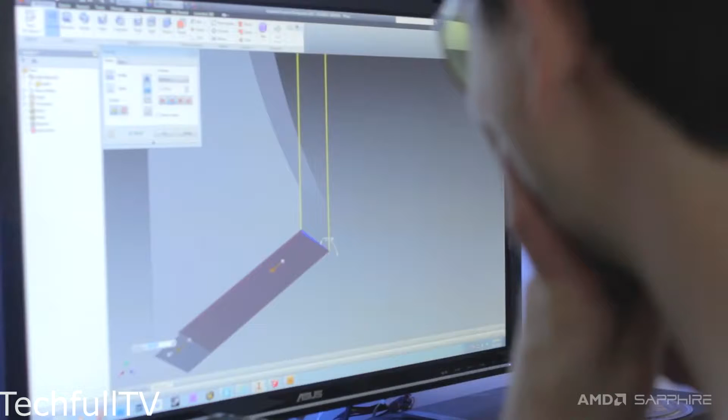I got my start building computers in high school. I was just kind of fixing grandma's viruses and building really low-end systems. I had a system I was pretty proud of myself, but I didn't really understand what computer modding was until I went to this LAN party in Oregon called PDXLAN.

We drove down there and I was blown away from the moment I opened those doors. I knew instantly what I wanted to do. Immediately, I started modding.

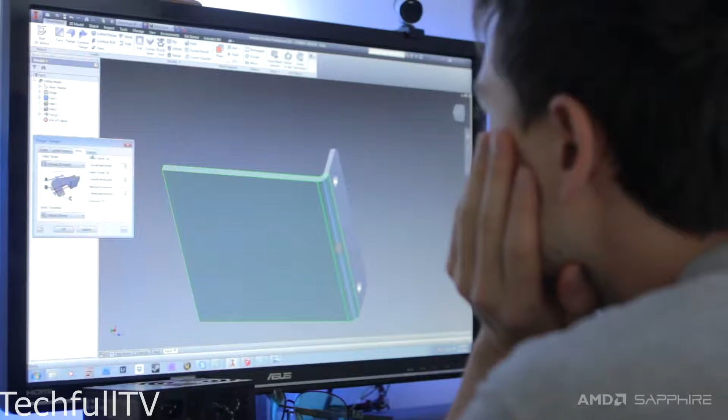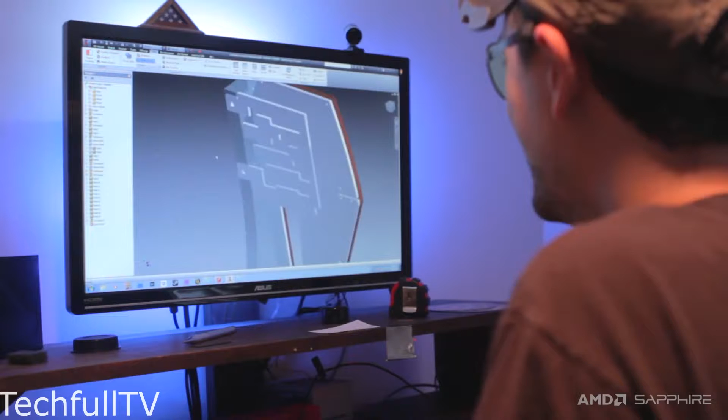For several years after that, I would be going to all the LAN parties in North America, building mods for all the competitions there, and I learned a lot. I went through a lot of material. But I was becoming drained because I had this passion. I wanted to do this full time, but it was becoming more and more clear that I was not going to be able to.

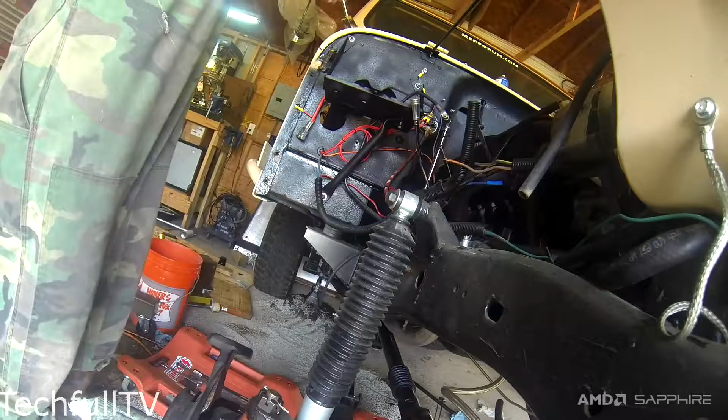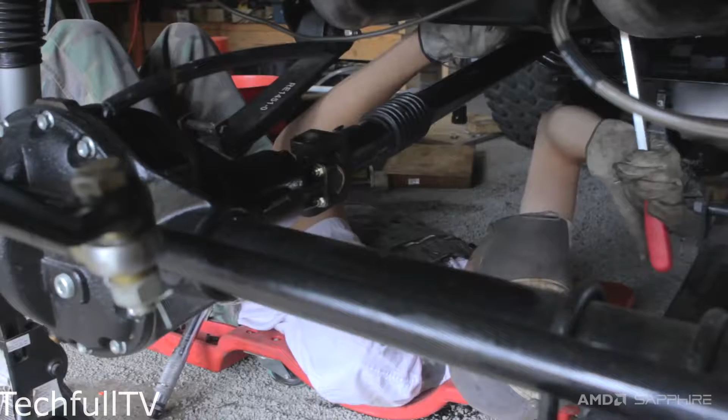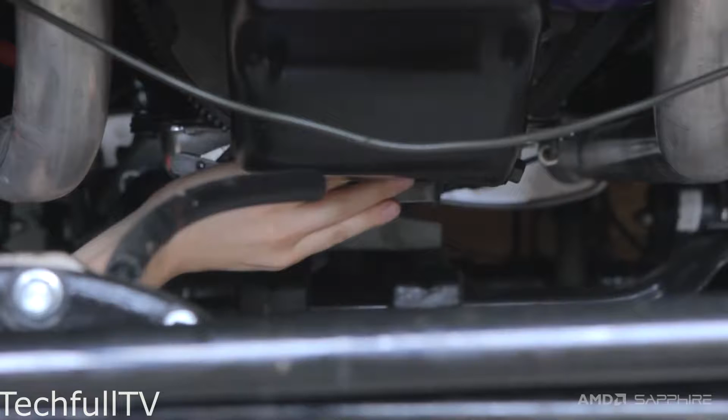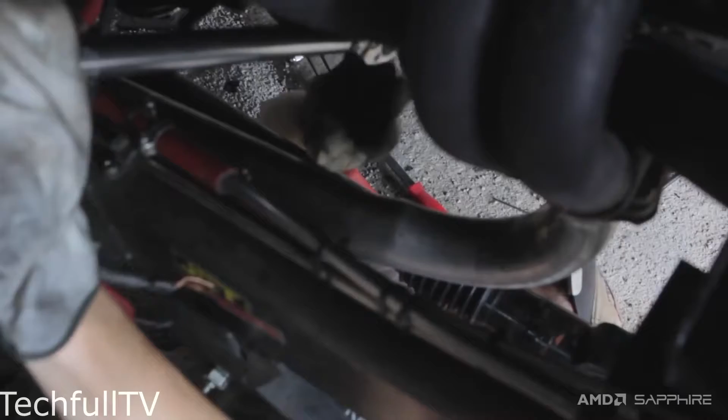And I flew halfway across the US. It was unfinished, and I placed really low down the totem pole. The reason that's important is when you're doing this full time, or you're thinking that you're doing this full time, you're trying to win to get the prizes to offset your cost. Either the parts are going to go into your next computer, or there's going to be some cash that might help fund your next computer.

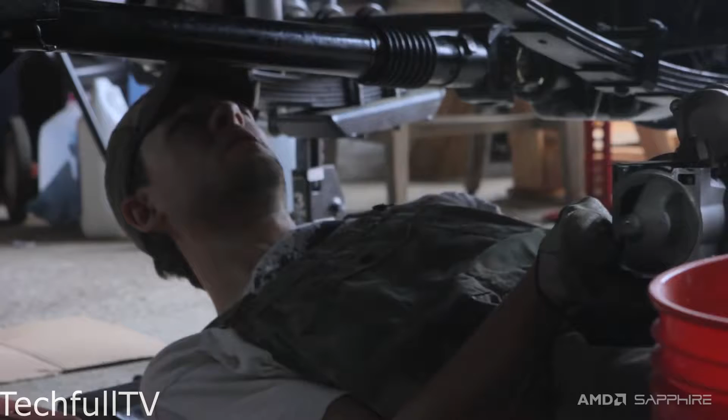But after I had lost for the 10th contest, I was like, I can't do this anymore. I don't know how to do this anymore. And I just kind of sat down with that realization that I wasn't going to be able to make my dreams happen. It sounds kind of cheesy, but that's how I felt. And something kind of clicked and went off. I was like, well, why not ask for help?

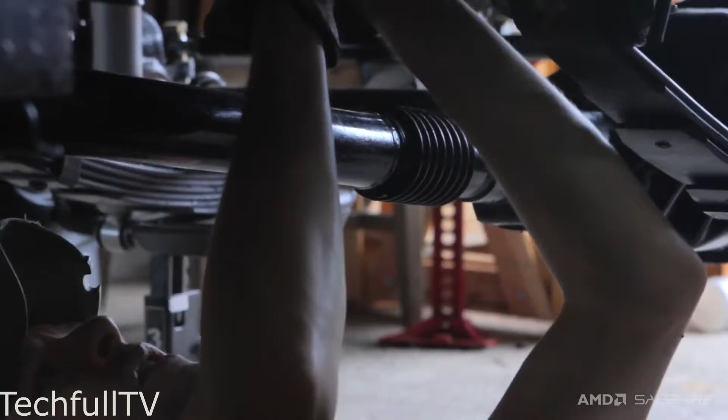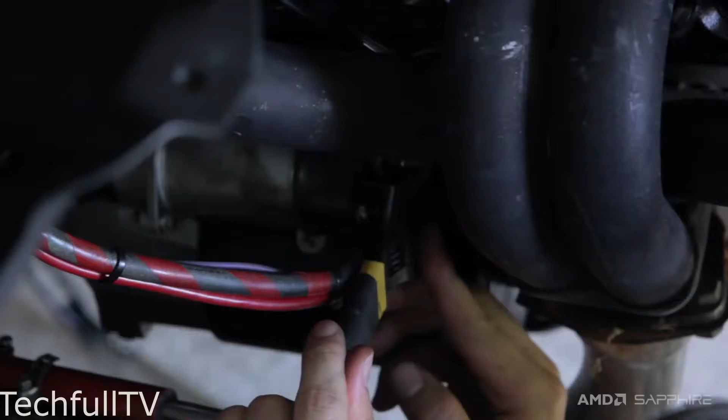But I walked over to the Sapphire table, and I regret that they were the last people I talked to, because immediately the rep there was like, yeah, I would love to see your work. So he walks over with me, and he truly liked the piece. He truly spent the time and looked at the details and commented on it, and I think that was the first time someone had actually really done that, and I was completely floored.

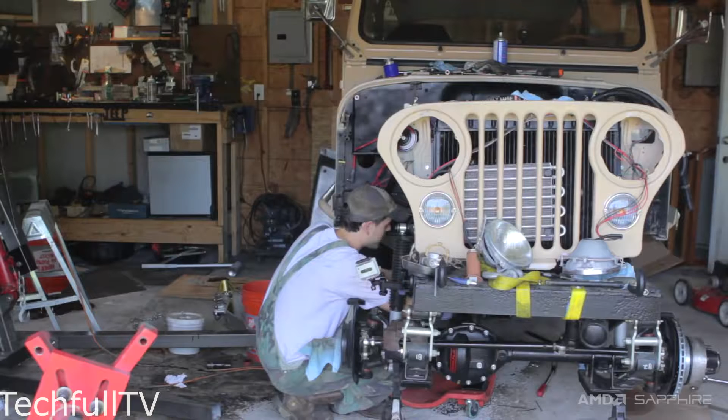It was Sapphire. I mean, this is a big company. They see a lot of good projects. And they said, yeah, Josh, we would love to do a mod with you. And I was just walking on air. That's really how I got my break from this being a hobby to doing this full time. I really owe it to Philip from Sapphire for getting me started.

They've always been super eager to serve me as a modder, a gamer, a business person. And so I was really excited to be able to serve them with this project. I'm hoping that if I document the process, it might encourage other people to start modding and scratch building, just as I was inspired early on.

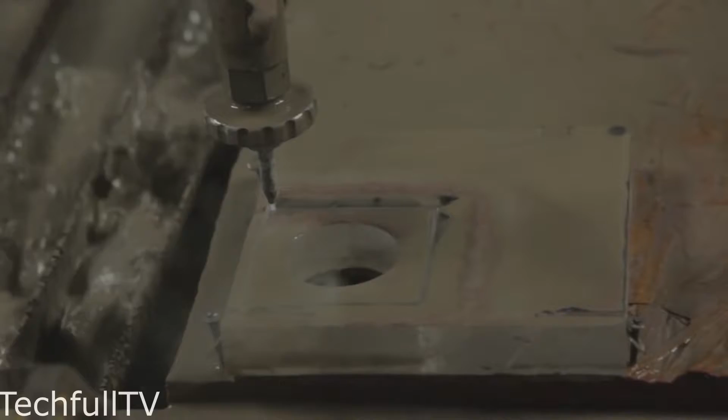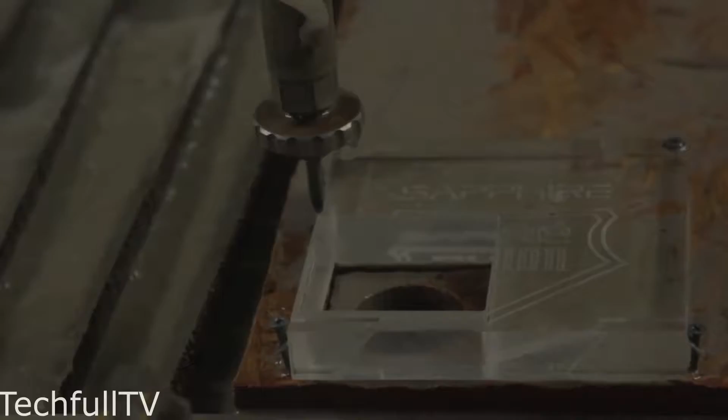Now that I finished my CAD model, it's time to go to work picking out the materials. I'm going to start with the wood because it's one of the prominent features of my design, but being that I've never worked with wood before, I don't even know where to start. I do like working with new materials for the first time - it's exciting, it's fun, but it's also frustrating. So I'm going to cross my fingers and hope that we can find something that I like.

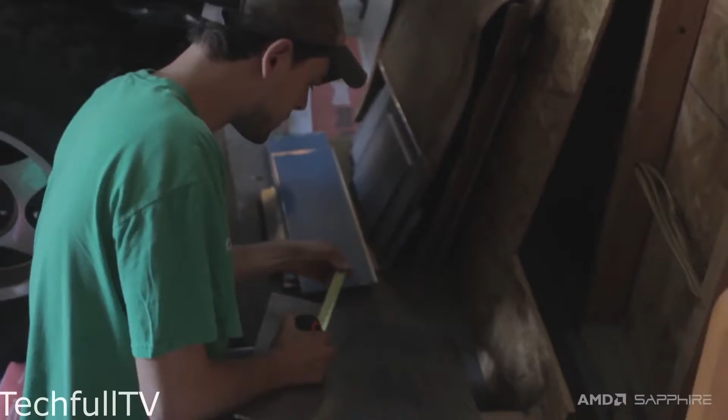Unlike the wood, picking out the aluminum was extremely easy because I already have a ton of 6061-T6 aluminum all throughout my house and my shop. I use this material for many of my projects, including my Jeep, because of how strong it is. This is basically aircraft grade aluminum - it is extremely strong, pretty firm.

Usually when you're bending and folding, you want to use something softer, like 5052. But we're not really bending a lot of it, just that one PSU bracket, and that's going to be a challenge. I don't have that figured out quite yet, but it's going to look pretty good when it's done.

As for the wood, I decided to start looking at some of the national store chains to see what they might have. After spending half a day looking around, it became apparent that I wasn't going to find anything exotic or unique, which is what I really want for this project.

I decided to get smart and call some experts up, aka furniture shop owners. Eventually I found a furniture shop that might carry some of the exotic woods I'm looking for. So I'm off to the Dado Family Clan Furniture Store to see what they might have.

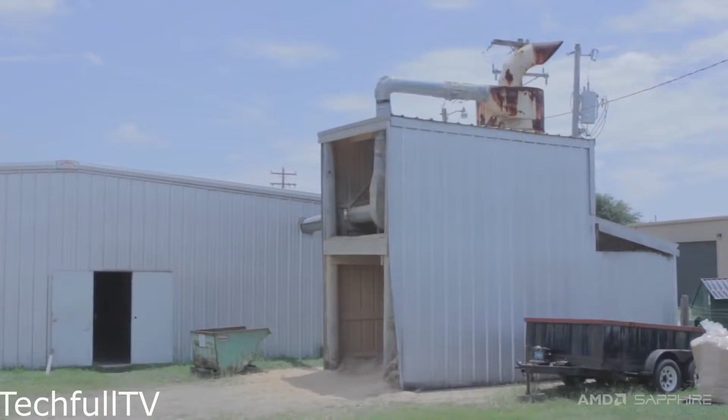When I got there, I have to admit I was not prepared. I didn't even have a tape measure, and I hadn't anticipated what I actually need to know to pick out wood. Apparently it's extremely different from species to species, and my confusion must have been apparent wandering around in a 100+ degree warehouse looking through stacks of wood, because several patrons stopped and offered some friendly advice and words of wisdom. It's the first cut.

If you get something that the grain pattern's about like this all the way through, that would look better. Look at that knot down there. It has a great color to it, but I just do not like that straight grain.

But purple wood and silver would look amazing. I eventually settled on something that I thought was striking. It's called Purple Heart, and I picked it out because it's actually purple. It's purple! I have never seen a purple wood before, and it is really, really purple. Not only that, it comes in planks wide enough that I could actually cut the side panel out of a single piece without having to glue it together.

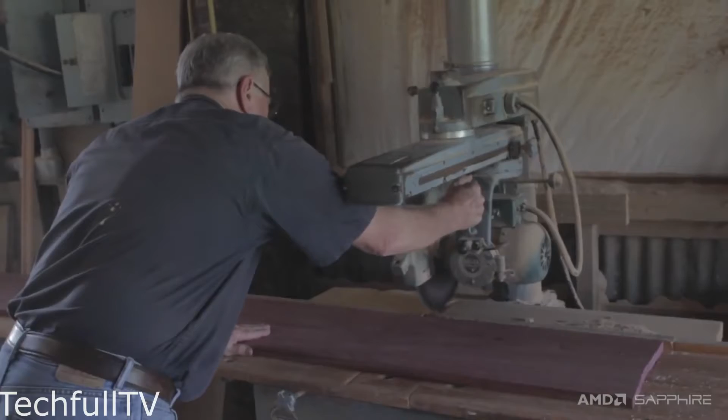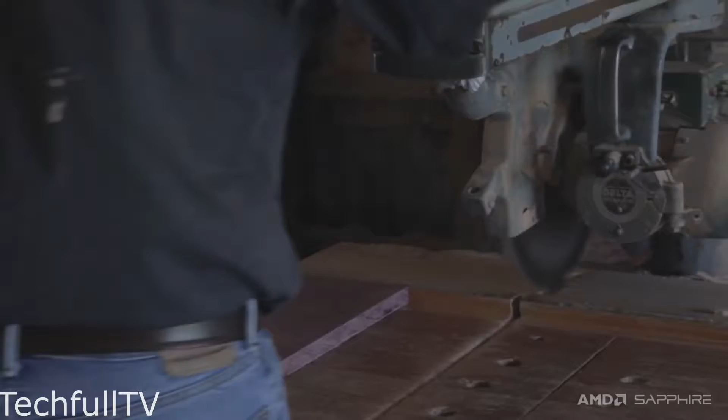I was totally happy with the wood, looking it up on Wikipedia and reading all about it on the way home. One of the things they mentioned was that it was an extremely hard wood, and I didn't really know how difficult it would be to work with until I got started. But on the ride home, I was happy that after several hours, I finally found something that would look perfect for my build.

So after I had picked out my materials, it was time to turn them into parts. Usually I'd use a table saw, a router, and a file, but because of my deadline, I didn't have time for that.

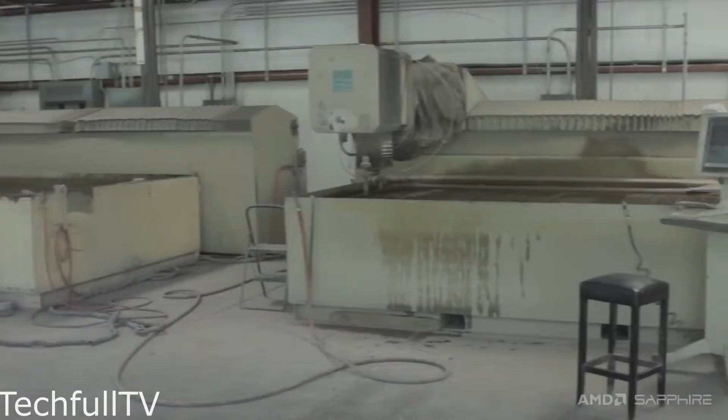I set aside a day to go find someone to help me out. I went to various machine shops, a welder shop, and even a shipyard, and eventually I found a place called Accurate Edge in Gulfport. Accurate Edge does water jet cutting, which is the process of using extremely high pressurized water with an abrasive to cut parts that are extremely thick. I actually don't know what a water jet can't cut out, as they were cutting through 6-inch plate steel when I got there.

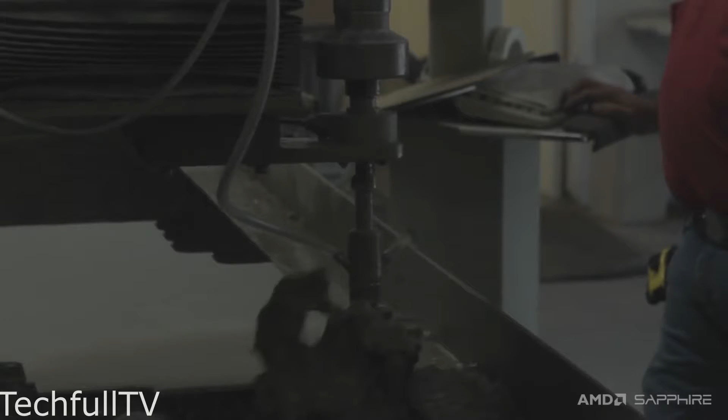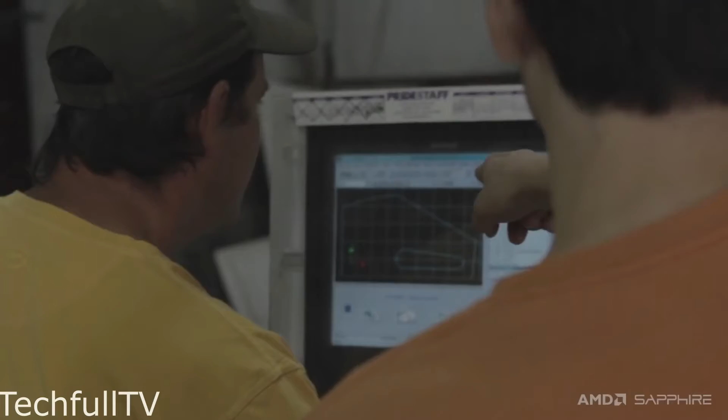Not everybody who'll be watching this has access to all the tools I do in my shop. To make a completely level playing ground with people thinking about doing this project themselves, I wanted to give them access to something that everybody has: partners. You're going to be able to find a CNC mill, a water jet, a laser, somewhere that you can ship your parts to have cut. So that's what I decided to do. Accurate Edge turned out to be a slam dunk for me.

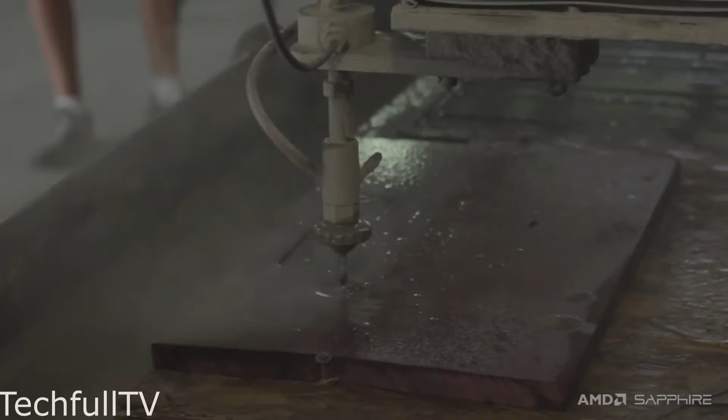We got there early in the morning, and the guys were just super friendly. They let me film, which is of course important to this project, but they also went the extra mile cutting the parts out. First we start with some demo pieces to make sure the water jet wasn't going to damage them. Once I was satisfied with the cuts, they handed them off.

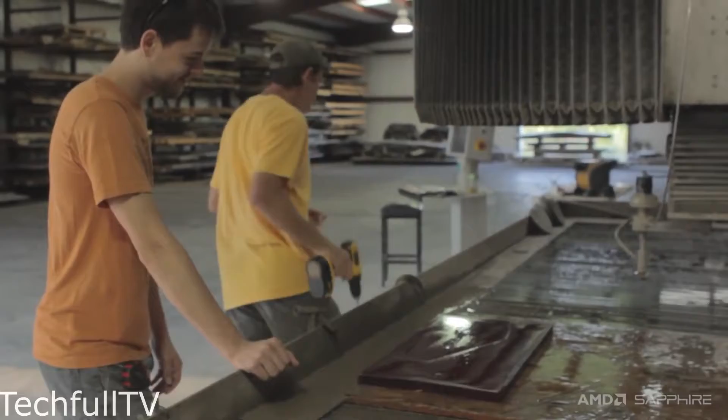Putting in the extra effort to find a local relationship was perfect. I love Accurate Edge, I love the guys there, and I'm definitely going to be coming back. It's really awesome when local businesses pull together and help each other out like they did today. I'm really grateful for that experience.

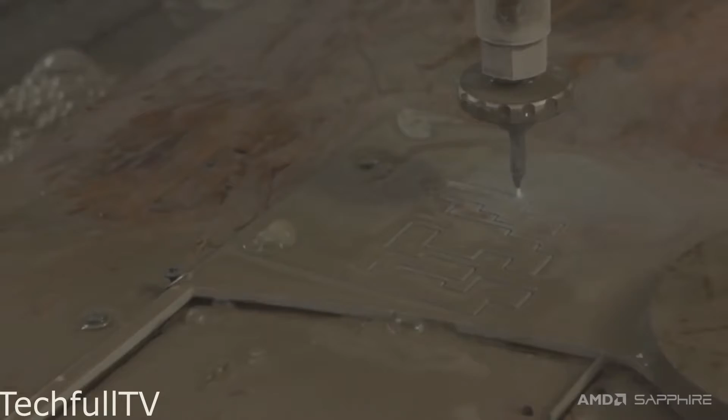So far, I've really stepped outside my comfort zone for this Sapphire build. Not only am I working with challenging materials, but I did a bunch of footwork trying to find people to help me. With how powerful technology and logistics are, it's easy to do the majority of a project stuck behind a screen. I know that when I look at the finished mod, I'm going to see the adventures I had getting to where it is, and the people behind it. I'm proud that technology took a backseat to relationships that help keep my project on time and done right.

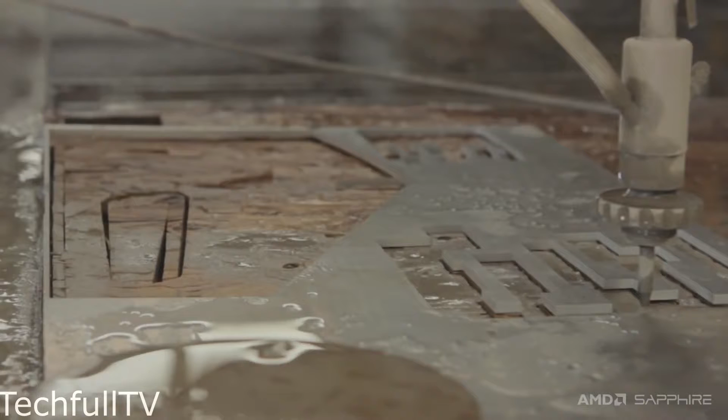The next stage of this project is to get my pieces powder coated, and keeping in the spirit of doing things local, I know just where to get this done.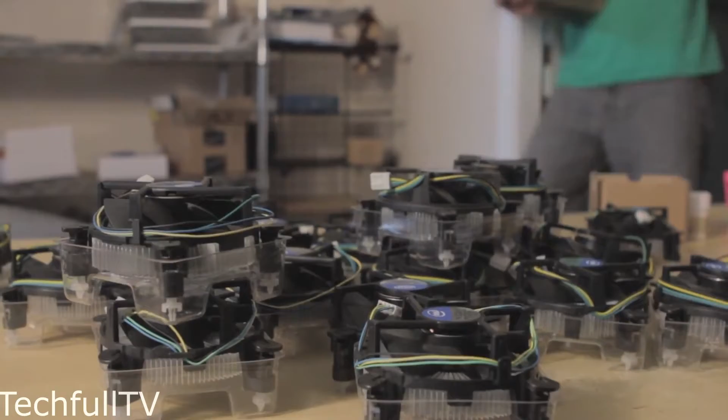Alright, what do we got? This is the...

So it's already pretty cool that this build is sponsored by Sapphire and AMD, but it's even cooler that they let me pick out which GPU I wanted. And I went with the 290X because it's wicked fast while balancing power consumption.

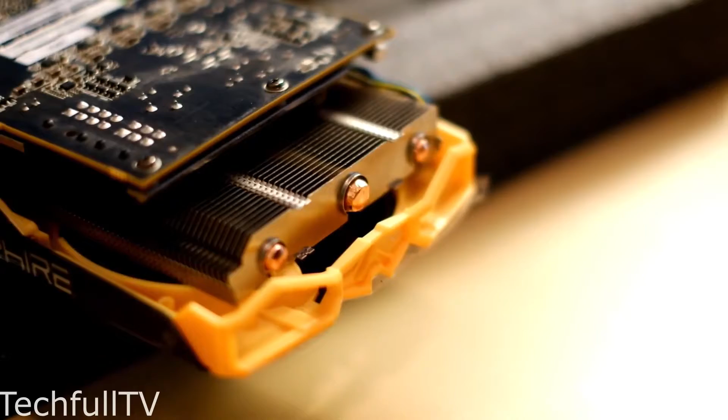This means I can use a physically small power supply, which gives me more design freedom in the sculpture. If there's one downside to the 290X, it would be the noise, but luckily Sapphire has several cooling solutions to choose from. I went with the Tri-X card, and by the size of the heat pipes and sheer surface area of the fins, I expect it to be whisper quiet.

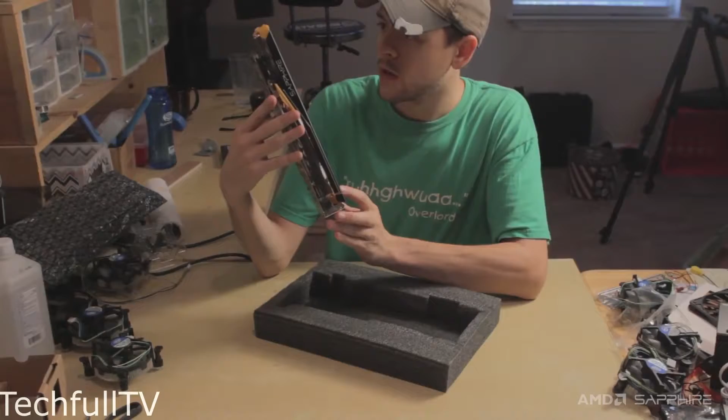I'm going to be changing a couple things up, just the color really, to more fit in the style of my theme. But man, gorgeous card.

I'm a huge fan of powder coating. It's a process where you electrostatically charge little particles of plastic, which then adhere to your metal parts after grounding them.

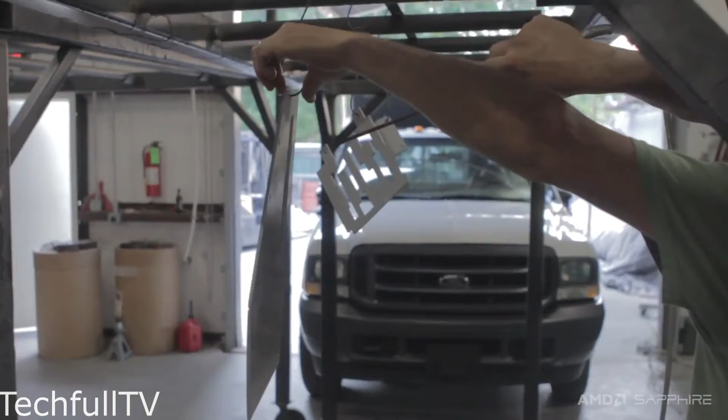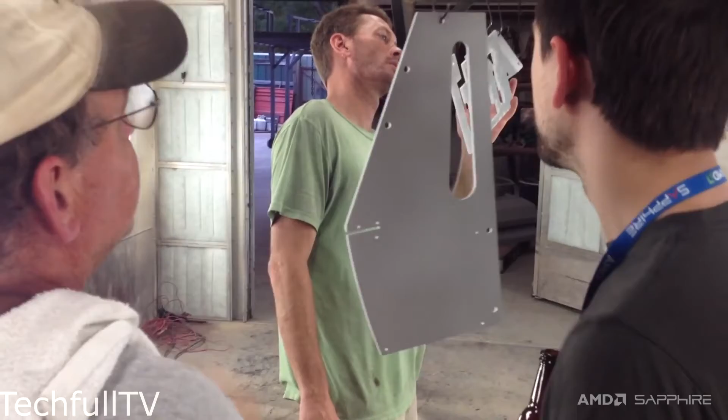And then you just bake it on. So it's like a plastic enamel, but you can make it look like anything. I'm still going to have them bead blasted, but I think I'm going to do a satin powder coat on them instead. This will give it a nice clear but soft finish while still having the kind of elemental nature of the aluminum.

I've taken many computer parts to IPC powder coating before because the guys there are just great. Mike and Chris understand the critical nature of my work, and they will not settle for anything less than show quality. As modders, we want everything to be color coordinated, but we shouldn't really purchase hardware based on colors alone, especially when we can just modify that ourselves. So I'm going to get started modifying this Sapphire card.

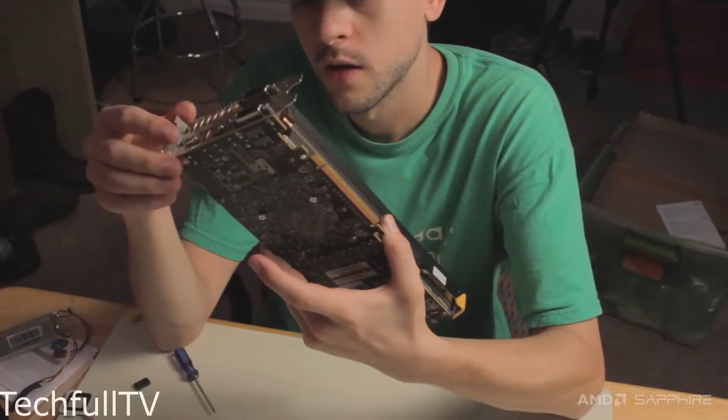Right now it already looks pretty cool. It's a pearl yellow and black, and this could fit in with a lot of different color builds, but it's not going to work for mine.

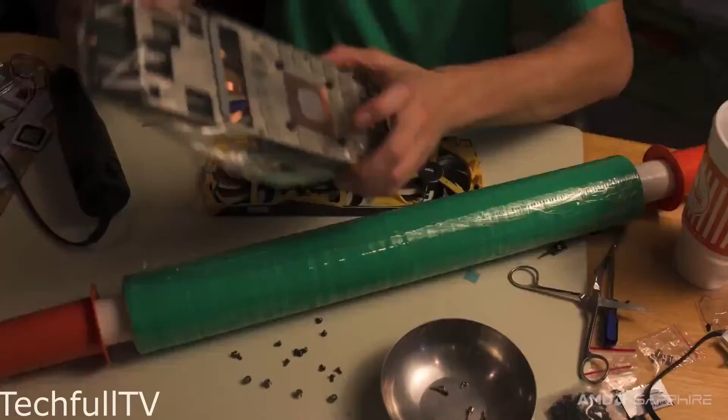I started by taking it apart, and I gotta say I was pretty impressed because this thing was put together entirely with screws. There weren't any little plastic clips that break off during disassembly. This was great because I was able to easily get it apart for painting.

I want a clear, natural looking aluminum, so I need to strip the black dye. To do this, I'm going to use an industrial strength cleaner called Grease Lightning. I've used this stuff before to remove dye from some of my tools just for fun, but since I don't have time to do a lot of scrubbing, I'm going to leave my parts in there a little longer than I usually do. Hopefully when I come back to the parts, all the dye will be removed by itself.

While those parts are stripping, I'm going to work on the fans. I don't really want them to be this black color that they were before. I want them to have a silvery hammer tone finish to kind of fit in with the rest of the build. Now if I just spray them right away, it's going to look pretty bad and it might peel and chip. So I'm actually going to have to sand it for a bit first, scuff up the surface, use a primer, and then finally finish up with my hammer tone spray.

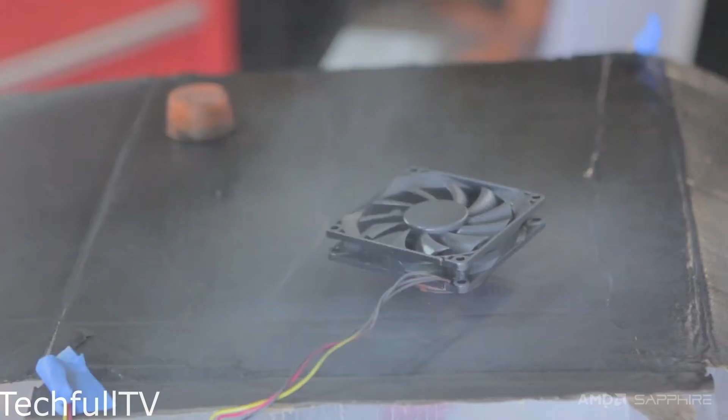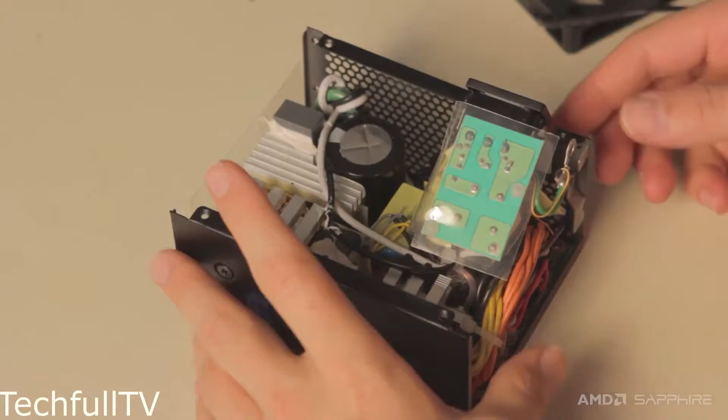I usually modify power supplies quite a bit to integrate them in the build, but for this reason, and don't ask me why, I actually kind of want it to look like a power supply. It's still kind of boring though, and I need to integrate it into the mod, so I'm going to paint it and add a little grill to it.

I started by hacking the old punch out for the fan guard first with a Dremel. Then I used a file to clean up the edges.

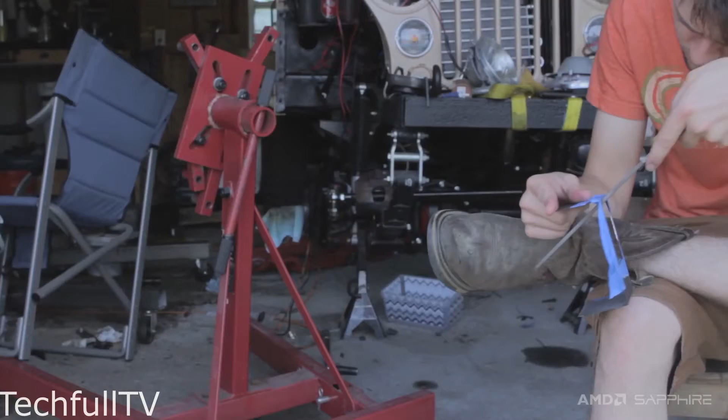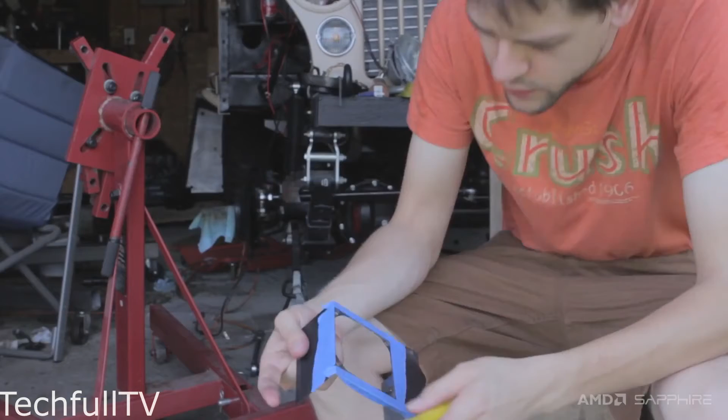I have a really ugly fan grill that's 80 millimeters, and again, I don't know why I have this laying around. It's exactly what I need to make the power supply look like a power supply, but not be as boring as it is. Drilling the acrylic was very difficult for multiple reasons.

Firstly, I was just stressed out over the piece because if that piece cracks, we're done, and that's the end of the mod.

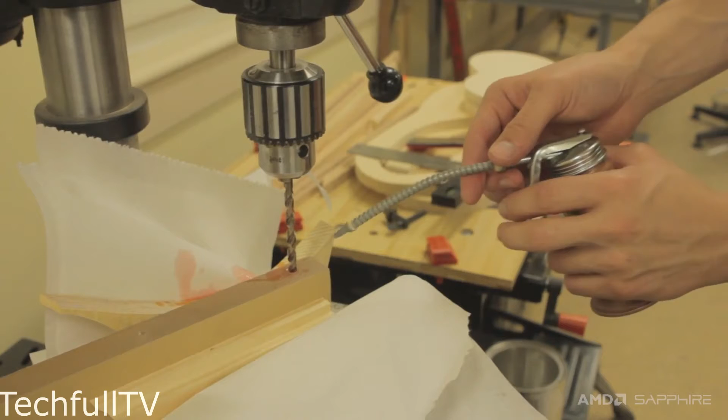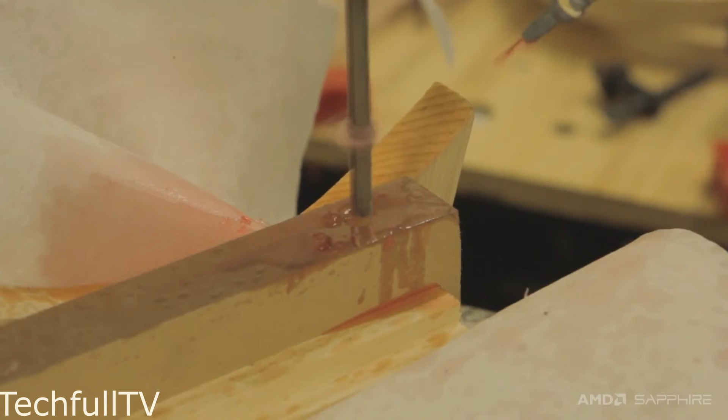And acrylic is extremely, especially the stuff I'm working with, that cell cast acrylic, it's extremely hard. You can go through drill bits like no other. Even with my cobalt drill bits, I had to take it real slow and use lots of lubricant. If I didn't, it would end up burning the acrylic, and it would make these little swirl marks in it, and it'd be white, and it would just not look good, and I could damage the piece permanently.

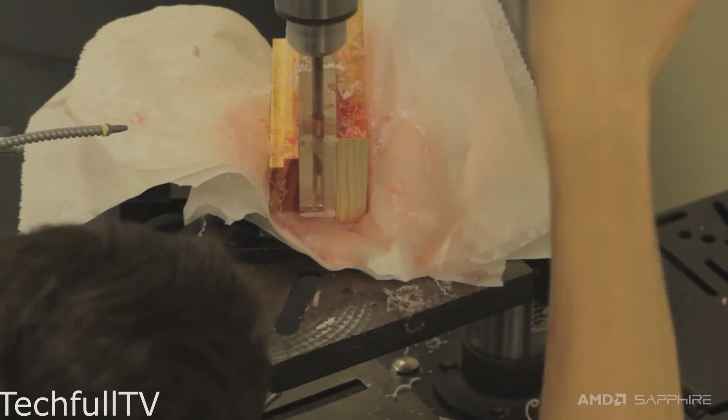And I wanted to have it be clear and smooth like glass on the inside of my drill hole, kind of like magnifying the bolt when it goes in. Because this is a main feature of the chassis, that back part. So lots of oil, kept it cool, kept the bit sharp, and kept the acrylic from cracking.

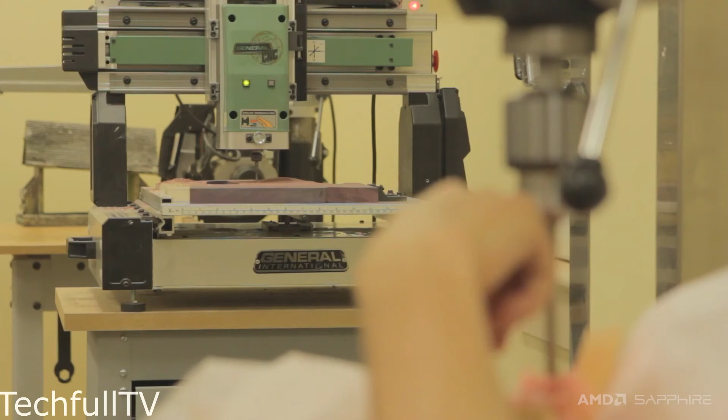19 hours. It took 19 hours for the CNC to cut out that bevel. It's a lot of cutting time for that very subtle part. And it took me probably 9 hours to set the CNC machine up. It was worth it in the end though.

It really takes a completely different life than just a flat board. A flat board, you cut it out and it's boring, just a board you can do with a router. But with that bevel, it really makes the piece.